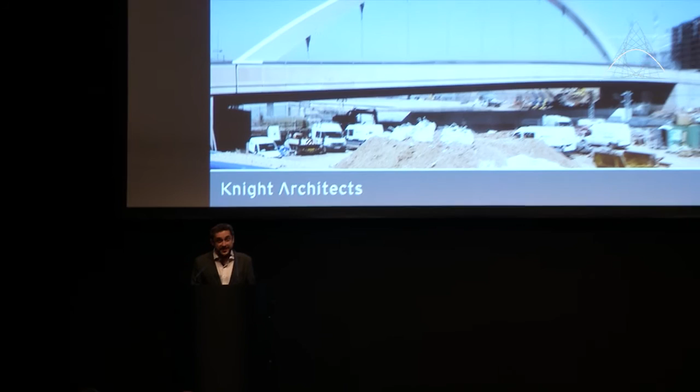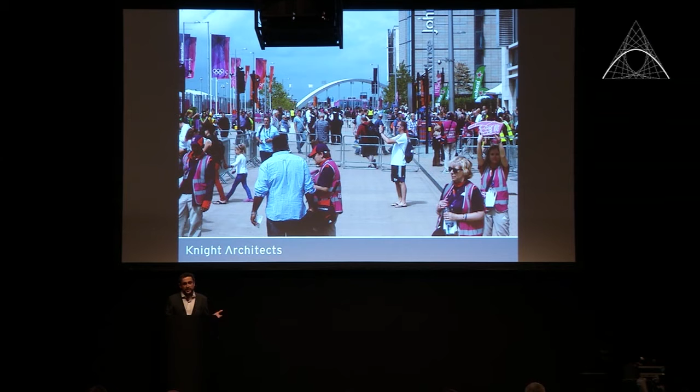Finally, what you can see here is a bridge in Stratford just before the opening of the Olympic Games in London, and this is an engineering solution, how the engineers see it. So it's beautiful, it's working, it's there, it's done. However, a couple of months later, you then see what it is all about. Every single bridge is about the people, and not only the people who use them, but also the people who live around them. So when you design a bridge, you always have to design it with the people in mind.

I'm going to take you to London. Most of you have probably been there before. So you can see there's the River Thames. Up there is Hyde Park, Regent's Park, and Westminster. So Hyde Park and Paddington Station. On top of that, there's the so-called Grand Union Canal running along there, which used to be the main route of transportation before the introduction of the railway. So it was basically the beginning of the Industrial Revolution.

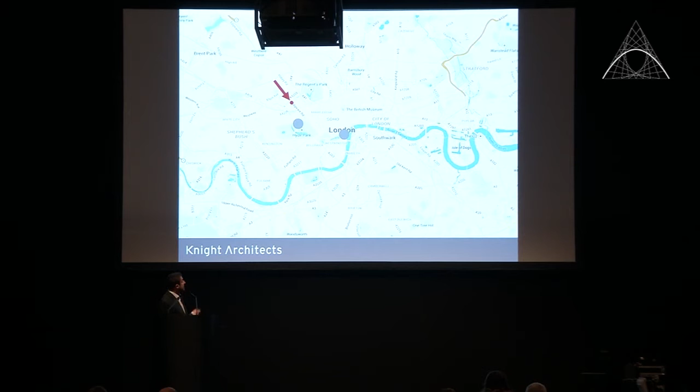South of that, there's the so-called Paddington Arm of that canal, running down there, and this is the site we're talking about. I'm zooming in a little bit closer, so you can see in the north the Grand Union Canal and a little crossing called Little Venice. So not only Italians have their Venice, we have one in London as well. And south of that is the Paddington Arm of the Grand Union Canal, which used to be a highly industrialized area, which is now redeveloped into retail, shopping, commercial buildings, and residential developments.

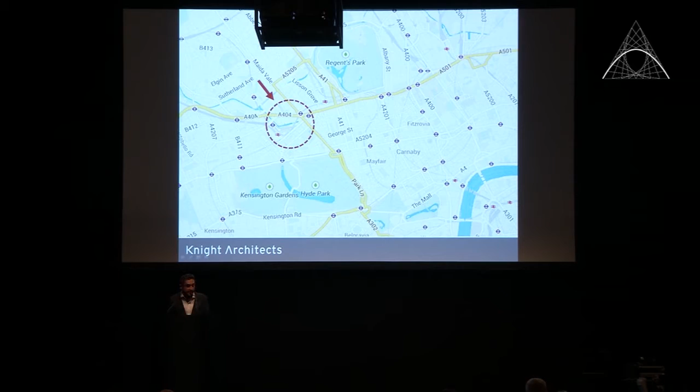So this is what Little Venice looks like, and we don't have gondolieri, but instead we have a lot of those little vessels, barges, which used to be designed to transport goods. Now they're, I would call it, affordable living. So people live on those boats. They dwell on them, and it's a fantastic way to live in this environment.

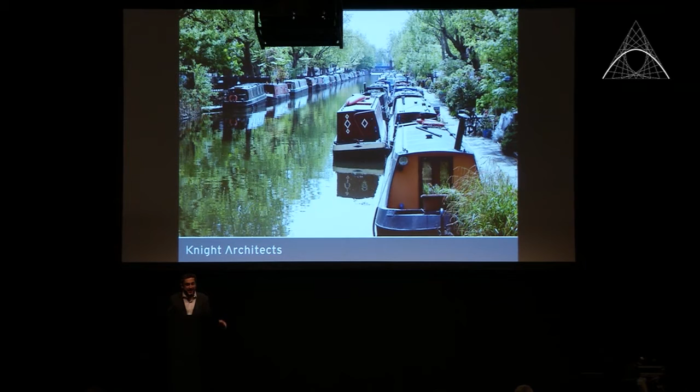Little Venice, what I showed on the picture, is slightly up to the north of the site that I'm showing right now. So you can see the canal is coming down from up there and running along here, ending pretty much at this point here. This development here is called the Merchant Square development. It's a dense development of, as I said before, retail and housing, including the One Merchant Square tower, which, at I think 110 meters, will in future be the tallest building in Westminster, called the Cucumber.

The planning requirements of Westminster Council were that if someone develops these sorts of developments, it's not only about putting money into it and generating revenue. They have certain conditions they have to discharge, and one of the conditions was improving the quality of the public realm, and this is how the whole idea of the Merchant Square Bridge emerged. On that site there was previously a moving bridge, which broke down due to bad maintenance and had to be replaced.

So the client, European Land, announced a limited competition with 3 participants for a new moving bridge, which on the one hand should be beautiful and have a certain flamboyance that would attract people to the site, attract tourists, but at the same time attract attention to the new development. On the other hand, there were the planning requirements to make the bridge move as quickly as possible.

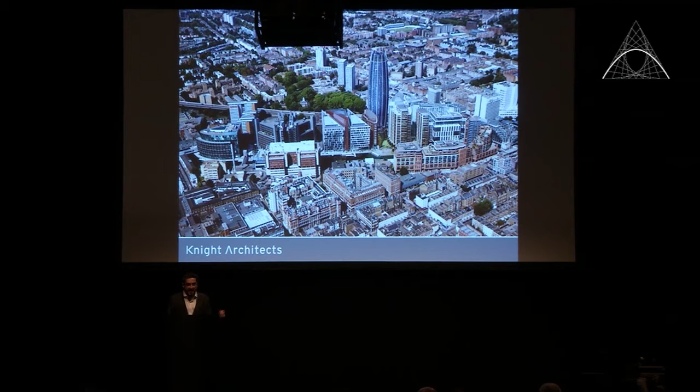The entire site is enclosed by high-rises, and it's hugely shaded, except for the view to the west, which is completely open due to the direction of the canal. That means that when the sun sets in the west, this so-called Sunset Terrace is completely covered in light, and people just enjoy dwelling there.

The alignment of the bridge was another thing to discuss. When we started doing that competition, which we finally won, we started to ask a number of reasonable questions. Number one: why do you want to have the bridge on a skew? Why does the bridge have to cross there, whereas the natural direction would be there? It would reduce the span. It would reduce the cost of the bridge. The impact would be less.

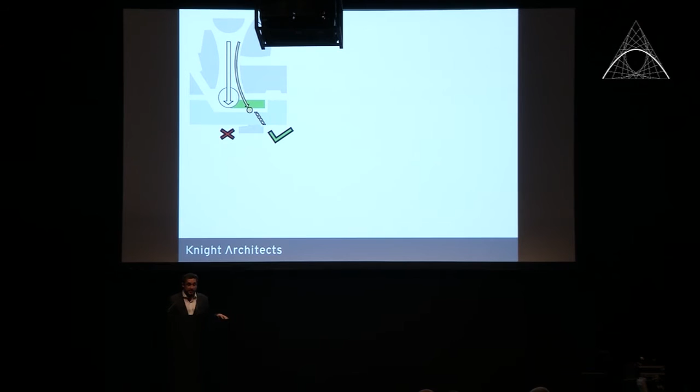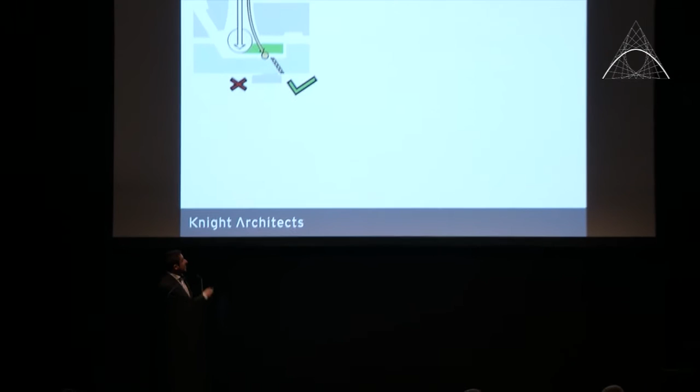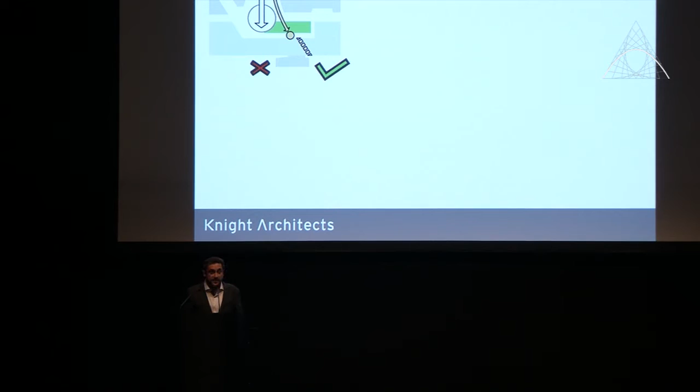But land requirements and property issues didn't allow us to do anything on the south bank, and also the connection on that side was blocked by an existing building that was impossible to tear down. So the natural route goes around those buildings, then crosses the Sunset Terrace, and then on a skew goes onto the other side, where you join onto the Edgware Road, going further down to Hyde Park. So it becomes a very natural connection for pedestrians and cyclists.

And we were wondering, why would you need a moving bridge? Maybe there's a different way to get over that. Maybe you can just raise the bridge so far that you can cross without moving it. However, the penalty we would have to pay in terms of ramps and stairs rendered that not impossible but unfeasible, and especially not beautiful. So the other approach was, let's do a moving bridge as the client required.

And we started looking at it; there's only a certain number of solutions for how you can move a bridge without inventing something completely new. The easiest way is to move it just vertically using 2 hydraulic jacks, only to get the bridge out of the shipping envelope. Obviously, as I said before, the land on the south side didn't belong to us, and we had no possibility to build any foundations, and definitely no hydraulic pits or anything like that. So we had to rule out that idea.

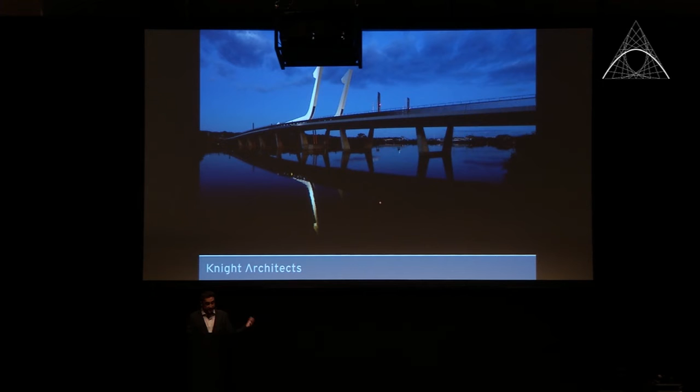That's a design of ours that we did a couple of years earlier in New Zealand, which is the Te Matau a Pohe rolling bascule bridge that has also won several awards. I'm just showing it to show you how the whole idea is. So you've got an object that is most of the time almost invisible, and only when it raises it shows what it does.

Here's a very simple sketch of the bascule bridge. A bascule bridge consists of two elements. You've got the deck, which is a cantilever. On the backside, you've got a counterweight to balance it. And then you've got a set of hydraulic jacks just to push it up. It's a very common system.

Probably most of you know it from excavators, JCBs, where the hydraulic arms are being lifted by the hydraulic jacks. So that's the way a bridge would move up, and we thought, yeah, that's a very efficient, good way of moving it. Hydraulics are hugely energy efficient, they are safe, they are reliable, and they are easy to install and also to replace, which ticked all the boxes for the client who was asking for a low maintenance structure.

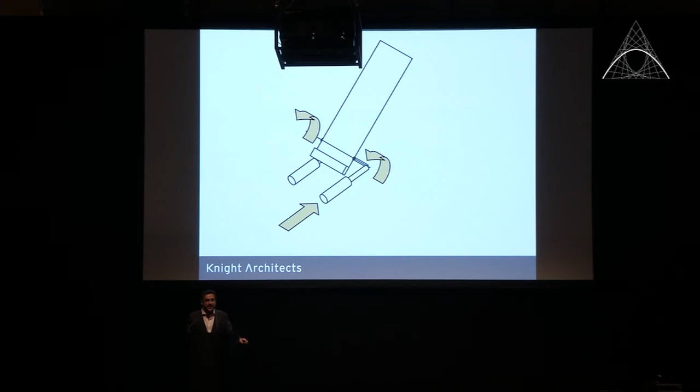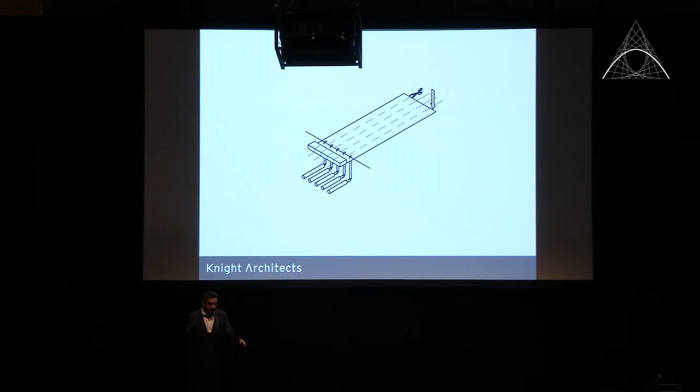The only thing that was missing was the flamboyant, the wow part that the client was looking for, something that would inspire tourists to come there and take pictures. So we thought, what if we just took an angle grinder and cut our bridge into five independent pieces, and then moved each of them independently. Theoretically, the tonnage doesn't change, the amount of energy you need to lift it doesn't change, so the cost shouldn't go up much. But you would have the advantage of being able to move the bridge like this. That was finally the idea that helped us win the competition.

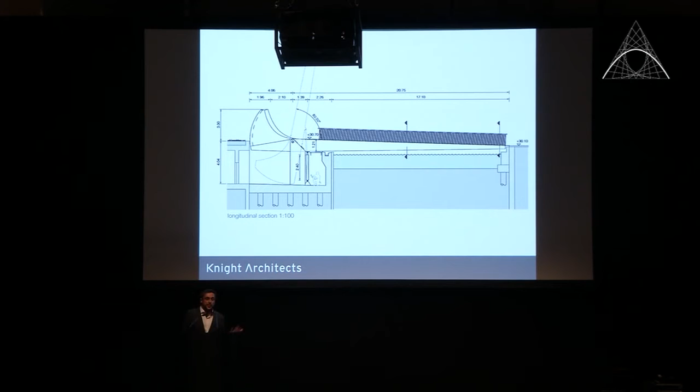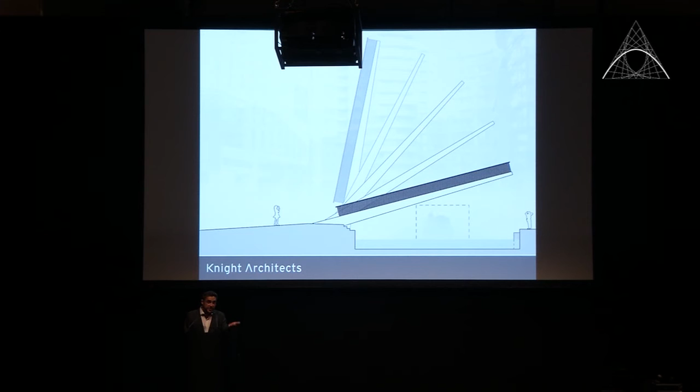And that's the first scale drawing that we showed to the client of how it would work. So you see sculptural counterweights and a 17-meter long cantilever, which is a single span beam when it's down, sitting on an axle, and a set of hydraulic rams that would push the whole thing up. This is the drawing showing the bridge in its lifted position, with the highest leaf going up to around 80 degrees and the lowest going just above the shipping envelope.

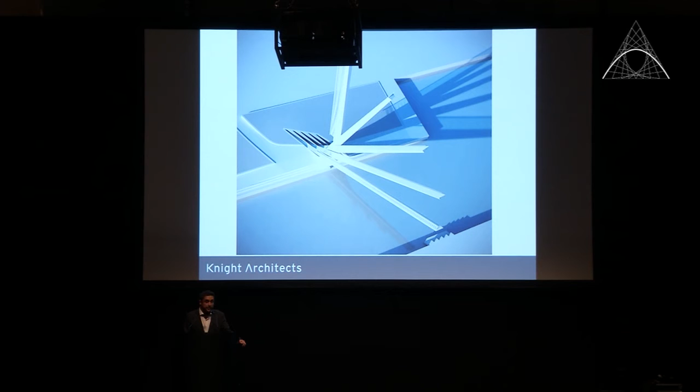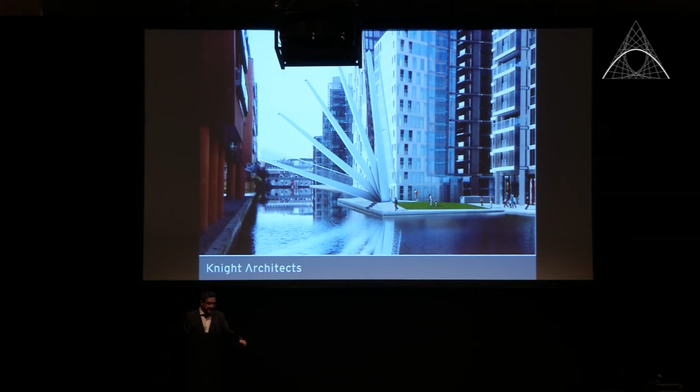Some initial renders, and some of you will recognize there's one problem with the counterweights. They disappear in the ground and open huge gaps. I will get back to that problem later on. We did a number of additional renders, and what was very important is you can see here the bridge is very toned down. It's very quiet. It's almost too quiet. So in order to tell people that there is something interesting going on, we decided to make those counterweights quite sculptural. So although they're disconnected visually from the bridge itself, people can see there seems to be something going on. And once it's lifted, that will attract the people.

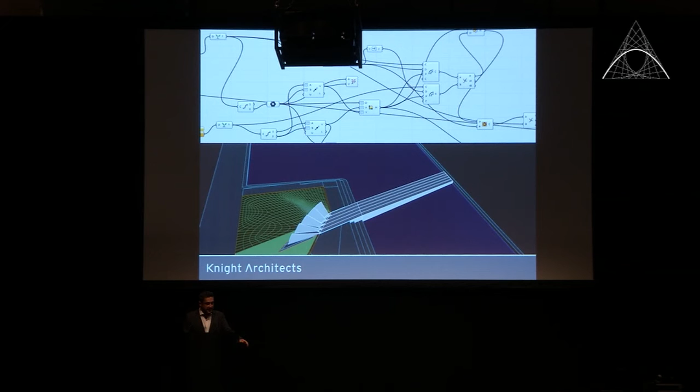We designed the whole thing in Rhino and Grasshopper together with the engineering office AKT II, who fortunately also used the same software. So it was a very enjoyable way of working where we were mainly exchanging programs and not drawings or 3D models. The geometry was hugely complex, obviously, because if you change slightly the diameter of a counterweight, the whole technical part changes, so the balance of the bridge changes and the structure needs to be redesigned. So this was how we used Grasshopper to optimize it. So that's a 3D model.

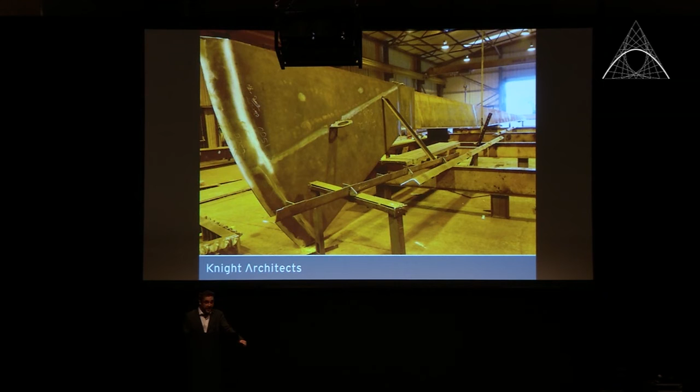This is what it looked like a couple of months later in the workshop. It's a company called SH Structures doing fantastic detail work. They work a lot on sculptures, and have a very high level of precision. But when I arrived at the site and saw the sheer size of one beam, it was extraordinary. So all five beams were produced in the workshop, then shipped to London to a dockyard, and from there put on a barge and shipped down to the site.

Most of you will see the fingers of the bridge were clearly not in the right order. There's a reason for that, and again I can only say my compliments to SH Structures. No matter how much you think and develop a concept, at the end it's the contractor who adds the last bit of thought to make it all work. So the arrangement of the counterweights is following a curve, so when shipping the fingers down to the site, they could fit underneath the arch bridges along the canal.

Let's look into the hydraulic jack pit. So we have five axles, five bearings. The fingers are sitting on each of them. Each finger is about 60 centimeters wide, so those bearings are 60 centimeters apart. They are staggered in their arrangement because the bridge is crossing the water on a skew. On the left-hand side, you can see a structure that will support the cladding that will keep people from falling into the pit, with little openings for the hydraulic jacks.

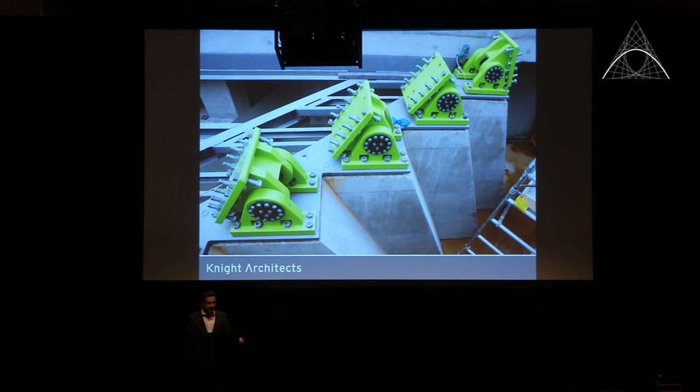Unfortunately, not big enough to get out. These are the hydraulic jacks already mounted and with the structure lifted. So each of them is of a size that it can be handled by 2 people. So if anything should break down, you can very easily replace it. At the same time, you get that very beautiful arrangement of technical elements.

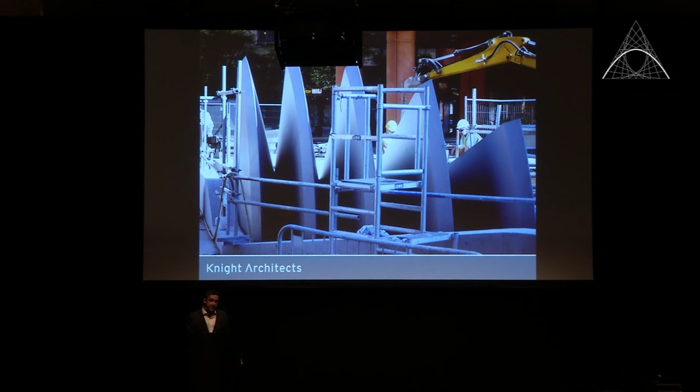And I was talking about the counterweights. So the counterweights became a point of interest during the design because the client got very concerned about the pit being open when the bridge is lifted and the counterweights disappear in the ground. So what we said is we want to design the counterweights in a way to mimic the inclination of each finger. So when the bridge is completely lifted, all the counterweights remain horizontal. So they're staggered to some sort of an artificial staircase.

And so these are the counterweights in the final mounted position, with little weights embossed on top of them. That's a slight reference to the industrial past of the site, but also it gives another hint to the people who pass it that it's actually something that has a function.

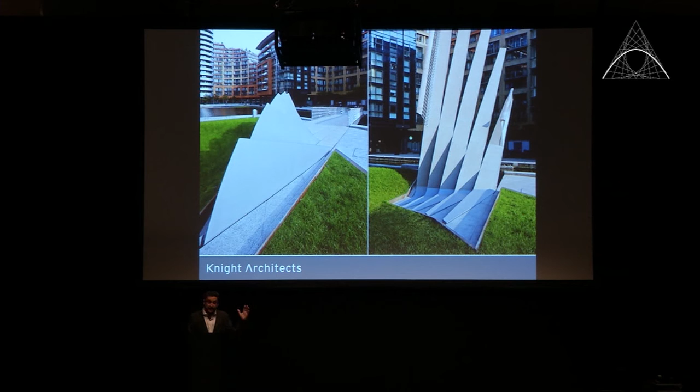And you can see here, that's a view across the bridge with the counterweights out of the ground, the bridge lowered. Once the bridge lifts, the counterweights sink into the ground, and you've got that absolutely safe space. People can walk on it. You can play on it. There's no one in a yellow jacket telling you off. It's absolutely safe. At the same time, the bridge is being exposed, and the lifted fingers reach their maximum effect.

Another very important part here, which came from the side of the client quite late in the design process, they got worried about people in high-heeled shoes getting caught in the gaps in between. So they said, well, you've got a maximum tolerance of 3 millimeters of gaps between the fingers over a length of 25 meters. We got slightly concerned, but SH Structures managed to do it without any problems.

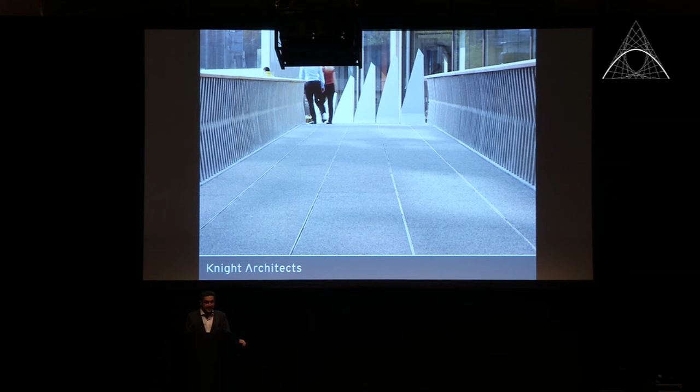The parapet is the other sculptural element on the bridge. And when we won the competition, we were slightly worried that when the bridge is down, it doesn't attract enough interest because it's so toned down, it's so unobtrusive. So we came up with that concept of a stainless steel parapet with 3 centimeter thick rods interlocking without touching each other. So in three-quarter view, you've got a very opaque, very safe environment that you can illuminate from above. At the same time, looking at it from the side, it becomes a very transparent object.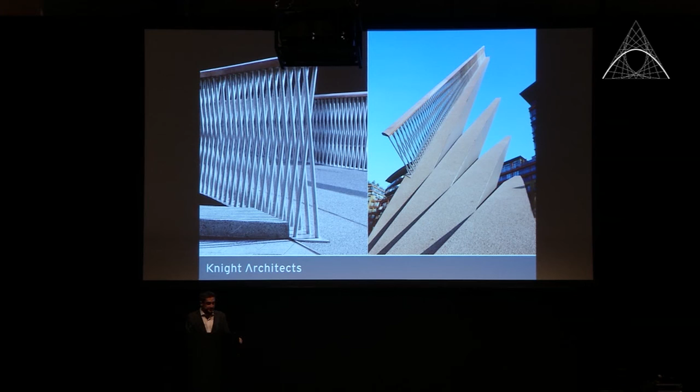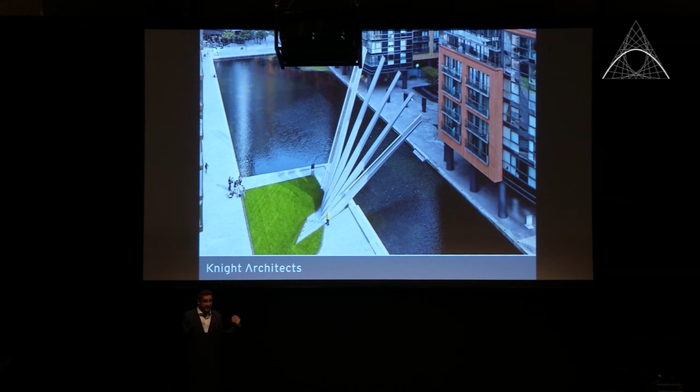So that's the view from above. It's been highly accepted by people. They're using it every day. They're crossing it all the time. You've got joggers, you've got the cyclists, people from the office crossing, going to town and going to wherever they're going. And at one point, the bridge starts lifting. So that happens 3 times a week on Saturdays, Fridays, and Wednesdays, always around lunchtime. And it's a huge attraction. It attracts people from everywhere just to take pictures and enjoy it.

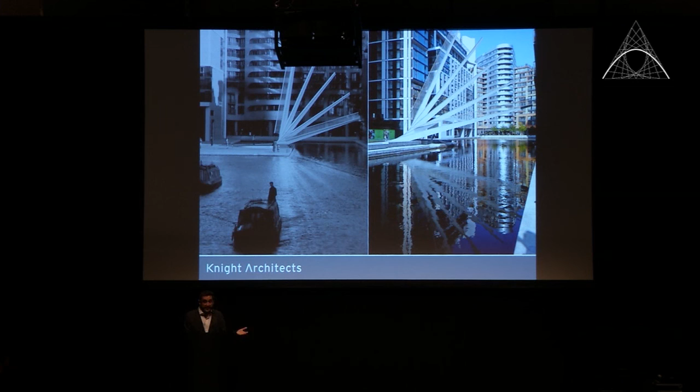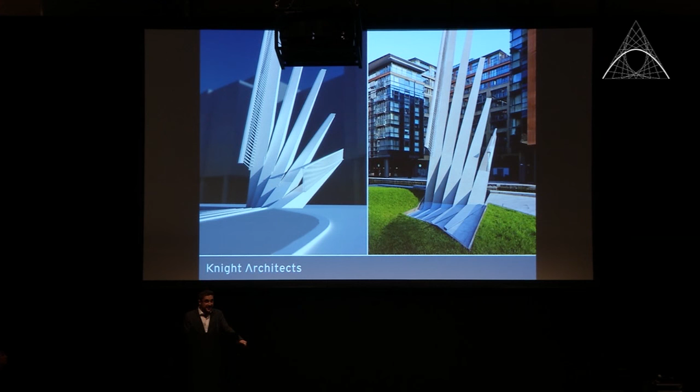Another very important part here is, obviously, you have a design and you do the renders, and you hope that the final thing would look like the renders. But in this case, we managed to make it look even better because we managed to reduce the size of the structure. So it's a very, very lightweight object. And you can see here as well, very well, that parapet, which now is very, very transparent, looking at it in elevation. So some more comparison of the studies and what it looks like when it was finished. And it's always a great thing to see the final object look better than conceived in a concept.

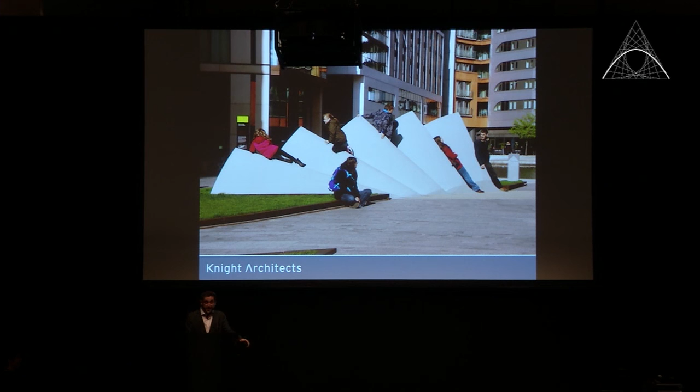And I said before, it's bridges. It's always about the people, and this isn't staged. I was sitting around there having a coffee, and you suddenly see children playing on that. For them, all those counterweights have become their own playground, and they fool around. They run up and down these counterweights, and it's just great sitting there watching it. And although we're here in Milan, London has its own fashion shows, and that's another thing that we discovered afterwards, that people started using the bridge for fashion shoots. So it wasn't something that was intended, but it's fantastic to see it being used in this way.

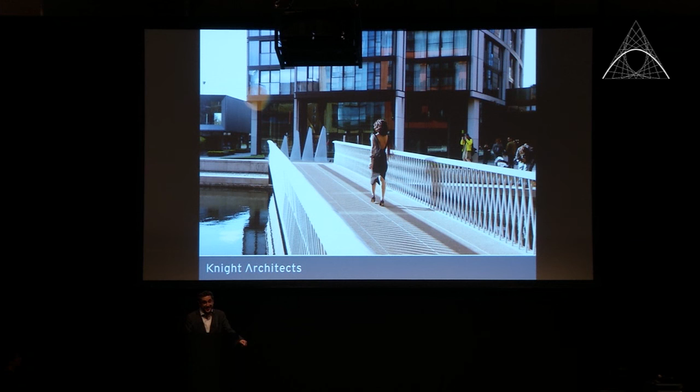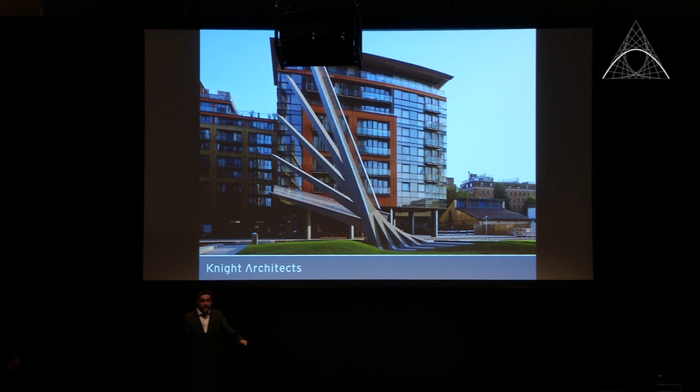So in total, we managed to come up with a design that, when it's in its position to be used by the public, is very subtle. It's toned down. It's almost non-existent. It just does its job. It provides a shortcut. But every now and then you press the button and it reveals that architectural beauty, that sense of drama and surprise that people appreciate. And I've got a little video which will show it in motion.